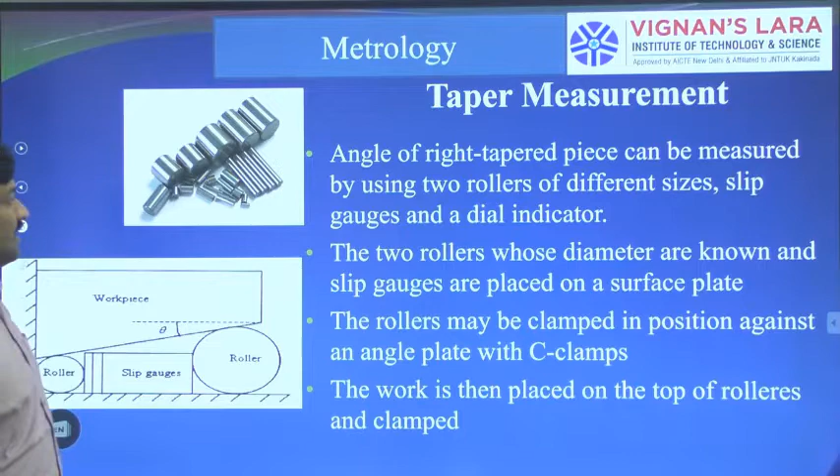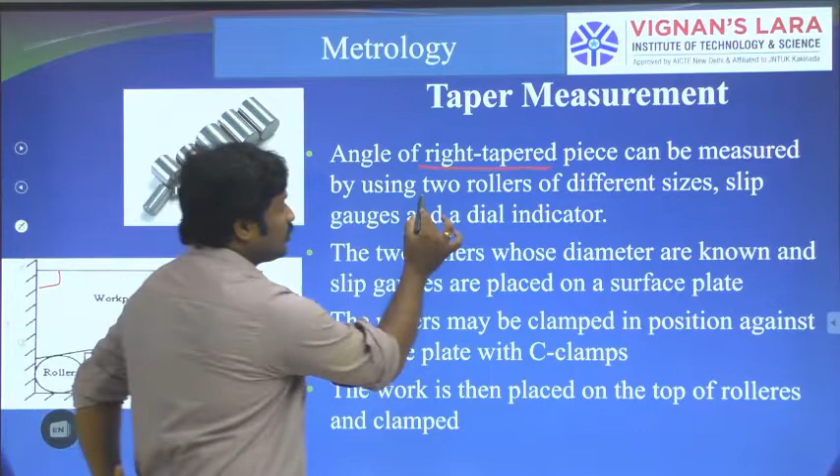Taper measurement: the angle of a right tapered piece. This is the component of a right tapered piece, where one of the angles is 90 degrees. If the component is right tapered, we need to know the procedure to measure the taper angle theta of this component. The angle of a right tapered piece can be measured using two rollers of different sizes. For this we require two rollers of different sizes, slip gauges, and a dial indicator.

If we observe here, two rollers are placed, and above the rollers the component is placed. We select two rollers of known diameter and a number of slip gauges. The rollers, whose diameters are known, along with the slip gauges, are placed on a surface plate.

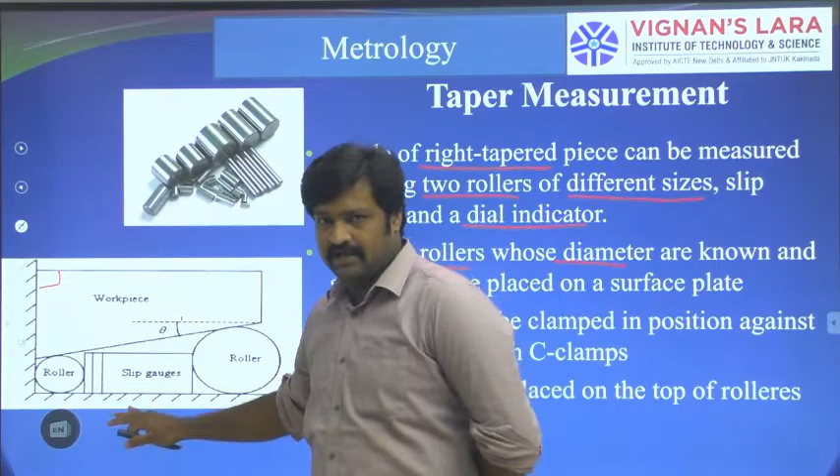First we need to take a surface plate. On top of the surface plate we place two rollers, whose diameters should be known. Only then can we use those rollers. On top of the rollers we place the component.

Next, the rollers may be clamped in position against an angle plate with C clamps. To maintain the rollers at a constant position, we use C clamps for arresting these rollers.

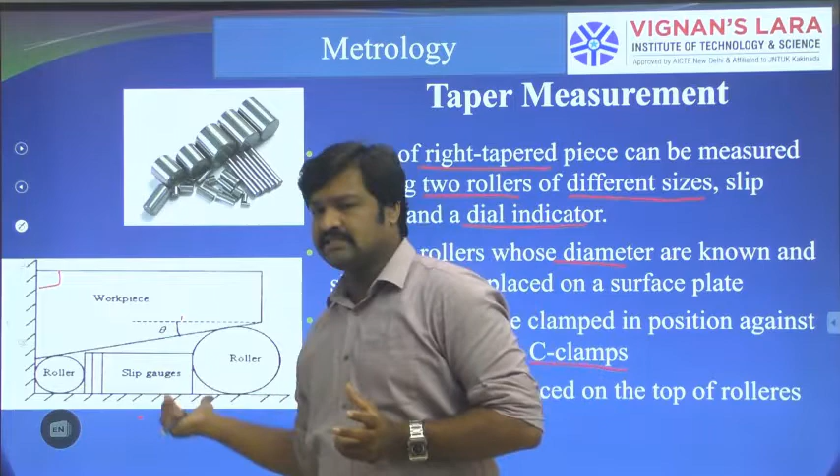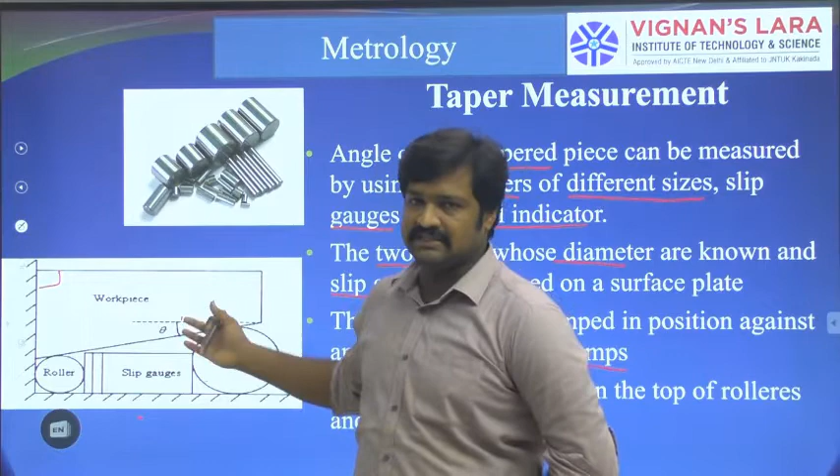The workpiece is then placed on top of the two rollers and clamped. If the angle of the piece is a right angle, the top edge will be parallel to the top of the surface plate.

The rollers can be adjusted such that the top surface of our workpiece is parallel to our surface plate. We need to adjust the rollers until the top surface is parallel to the surface plate.

To identify whether the surface is parallel or not, we use dial indicators. By moving the dial indicator along the top surface, it should show zero deflection throughout the length. If it shows zero deflection, then the upper surface of the component is parallel to our surface plate.

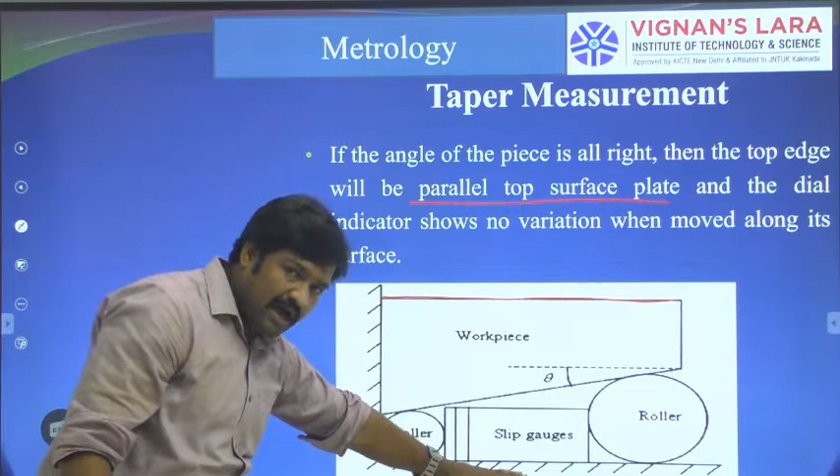The dial indicator shows no variation when moved along its surface. Until the dial indicator shows zero deflection, we need to adjust the rollers so that it shows zero.

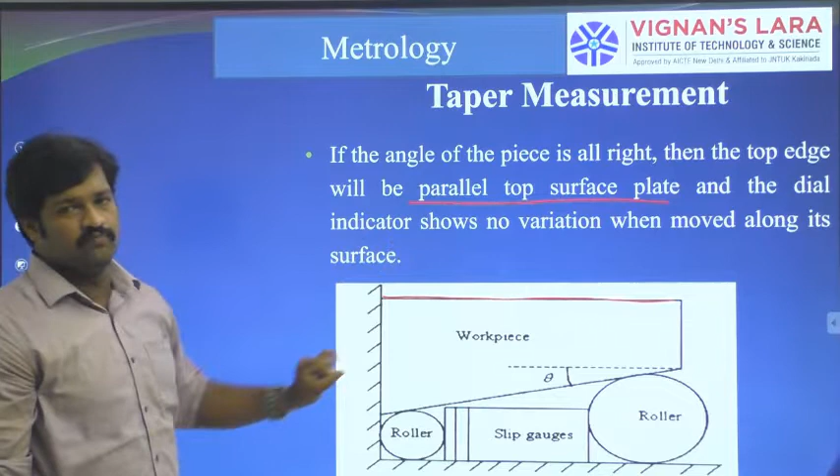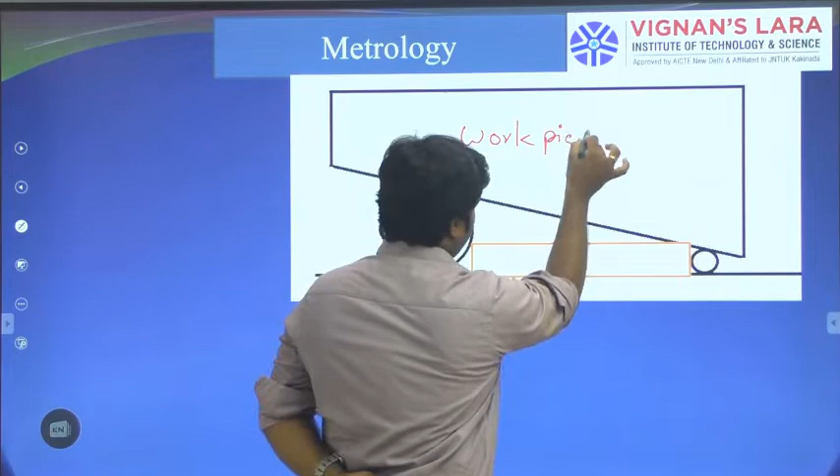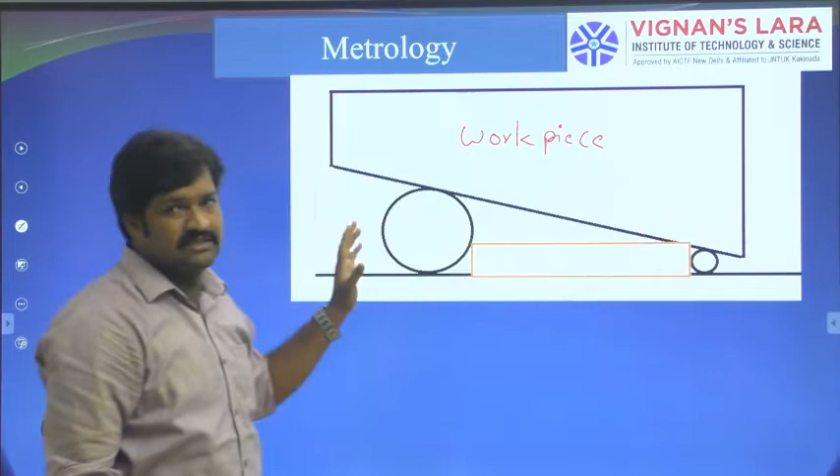This is the schematic: this is our workpiece, and on the bottom we use two rollers. In between these two rollers, some amount of slip gauges are placed. To identify the distance between the two rollers, we place slip gauges.

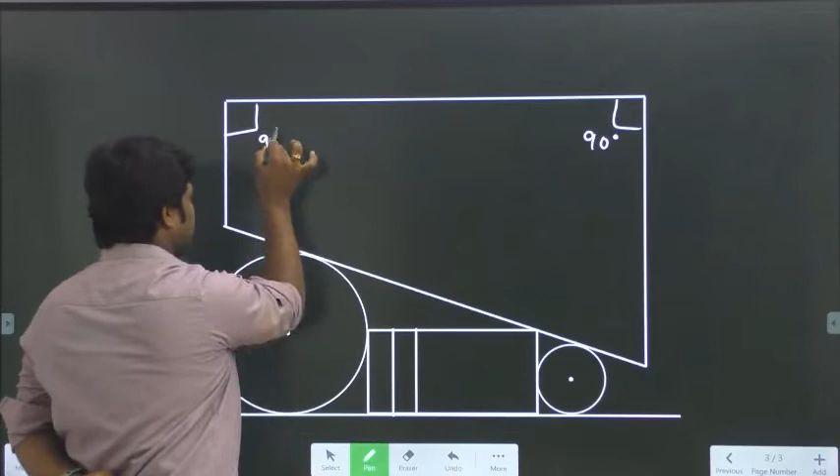The top one is the right angled workpiece. This is a right angle, and here also it's a right angle. The angle of this component is 90 degrees. Now we need to identify the taper angle, which is angle theta.

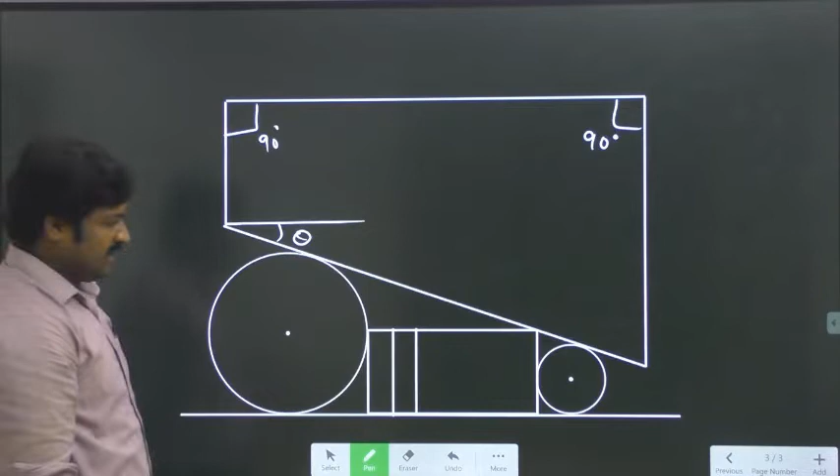For this purpose, we consider two rollers, roller 1 and roller 2, having known diameters. The smaller one has a diameter D1 and the bigger one has a diameter D2. So D1 equals the smaller diameter, whereas D2 is the bigger diameter.

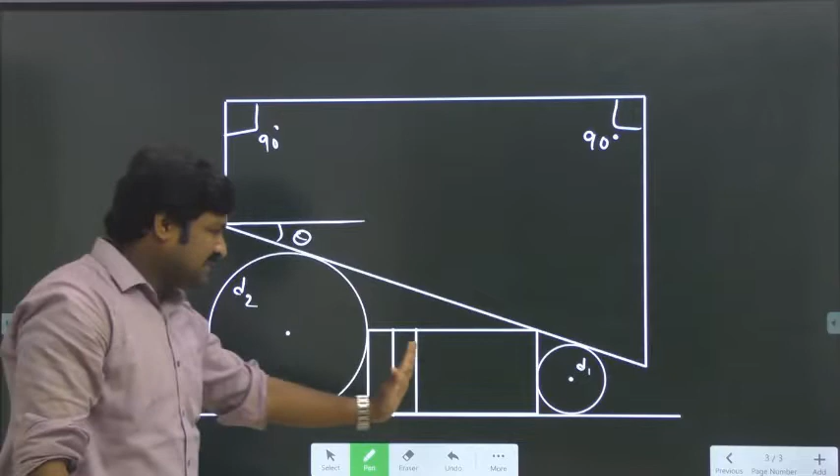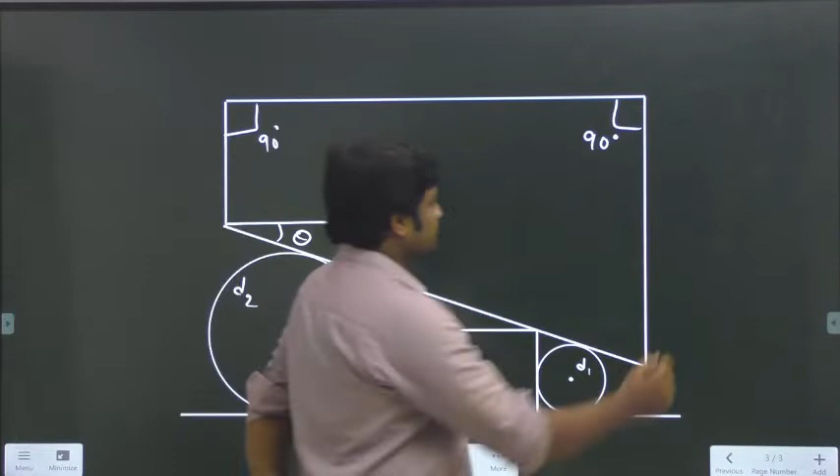Now in between these two rollers we place slip gauges. We know the length of the slip gauges, since each slip gauge has its thickness value marked on one of its faces. If we add up all the values, we get the length of the slip gauges, considered as L. So D1 equals roller 1 diameter, D2 equals roller 2 diameter, and L equals the length of the slip gauges.

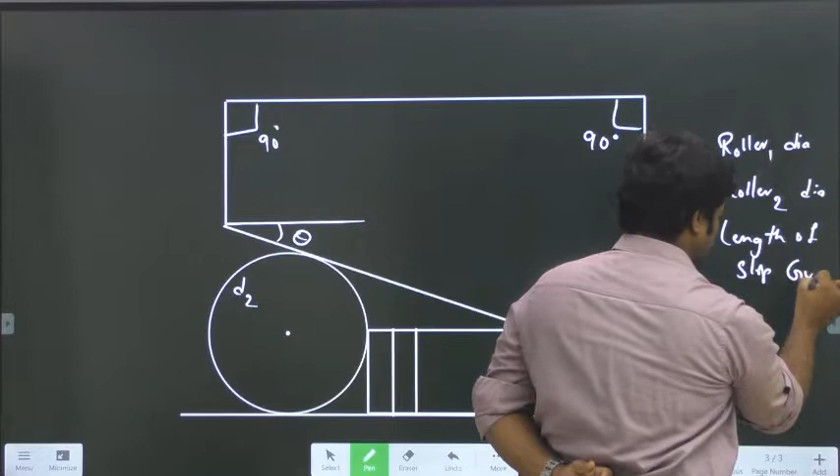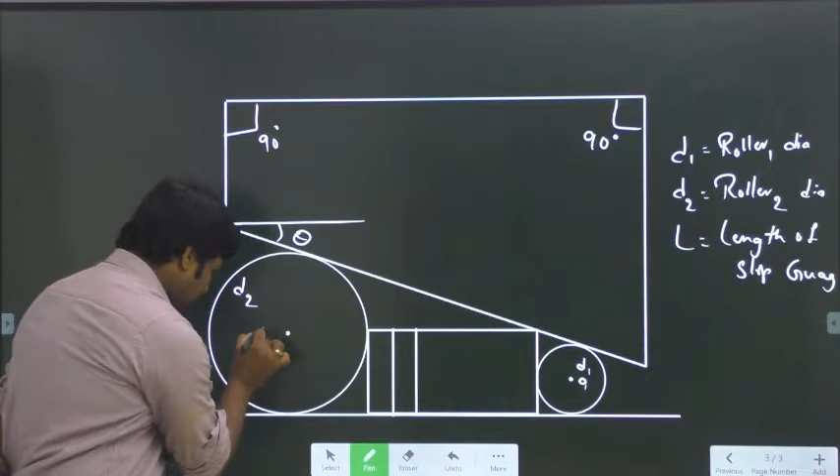So the center of D1 I am considering as O1, and the center of the second roller is O2.

So now I am drawing a line parallel to the surface. I am placing this line from the center of O1. Now it is parallel to our surface. Similarly, we are drawing one more line.

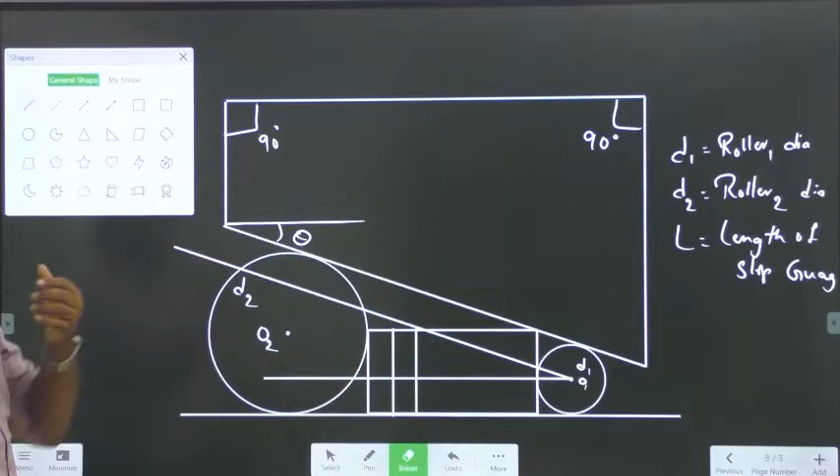Now this line is along the bottom surface of our component. Now we are placing this line. This is the line parallel to our slope, meaning our angle. Now one more line, parallel to this. So now this is the angle theta.

Now this is the angle theta. So theta is to be identified. We have drawn this, so now we are drawing one more line.

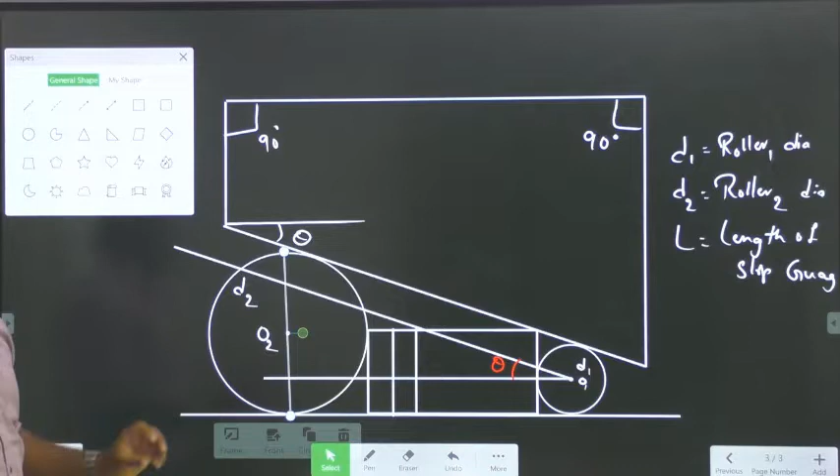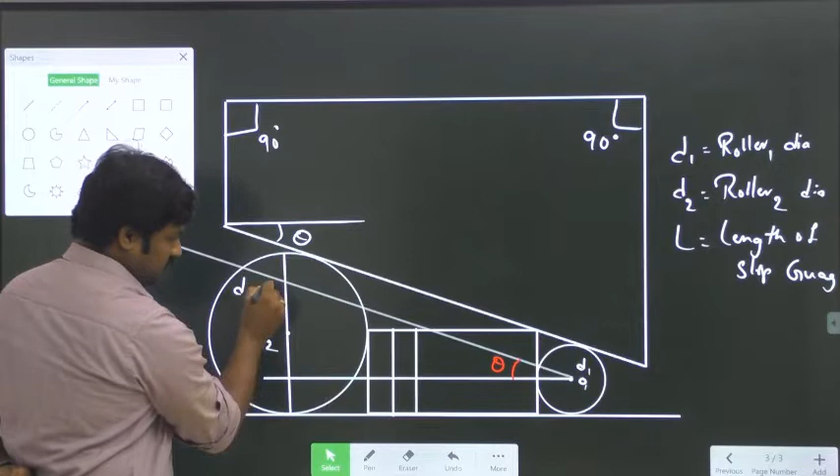Now the line is having a diameter of D2. So now we are marking this, labeling this as O1, O2. Now I am labeling this as A and this as B.

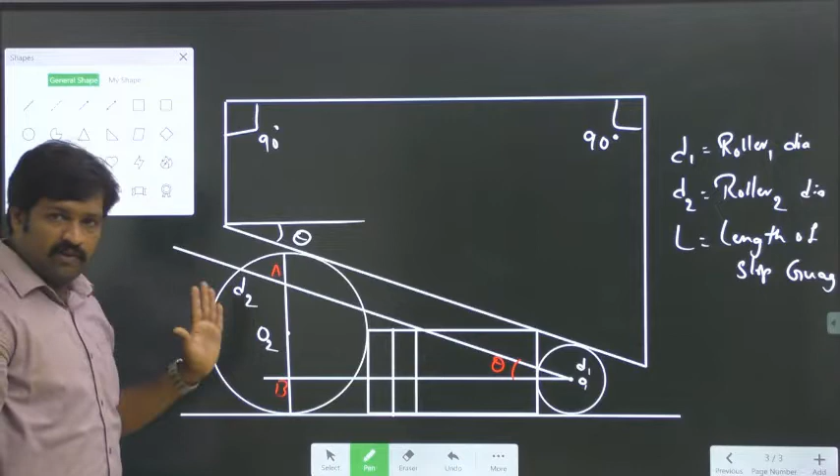So now I am drawing one more line that bisects the angle, from here to here. This line is bisecting our angle, therefore our angle is theta by 2. Now the angle is theta by 2. So here A, O to B.

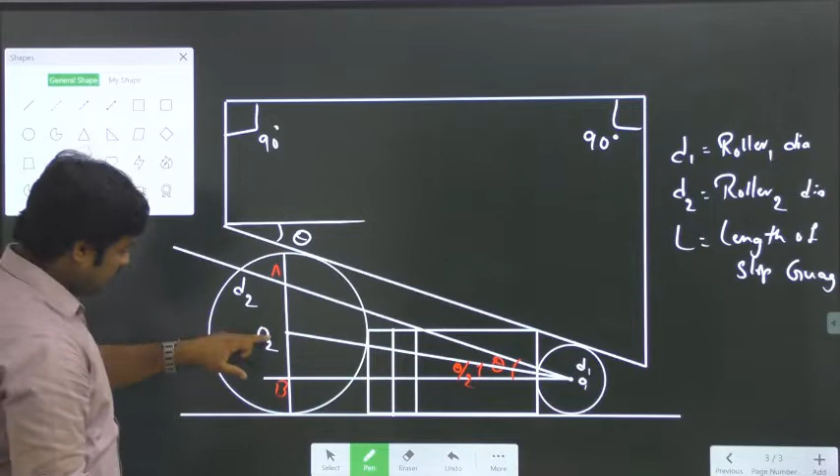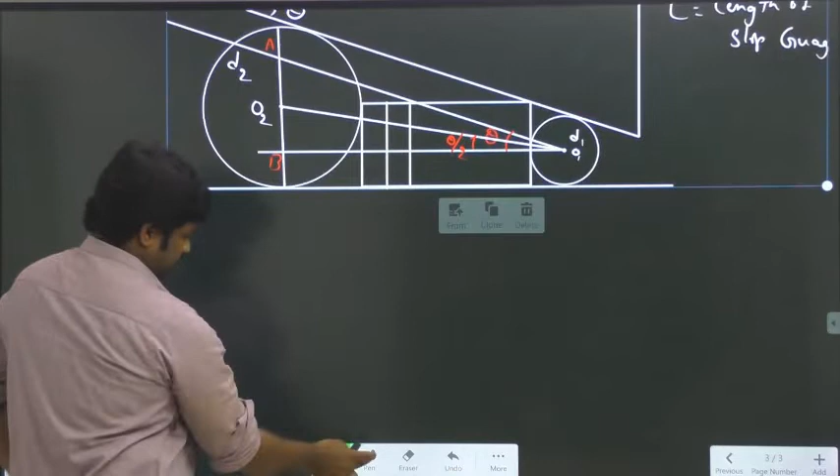So now we will take the triangle O1, O2 and B. From this triangle, tan theta by 2 equals the tan formula: tan theta equals opposite side by adjacent side. Opposite side equals O2 to B by O1 and O2.

Now we need to identify the lengths. From here to here, the length is D2. From here to here, the length is D1. From here to here, the length is L, that is the length of the slip gauges. Okay, these are the various lengths.

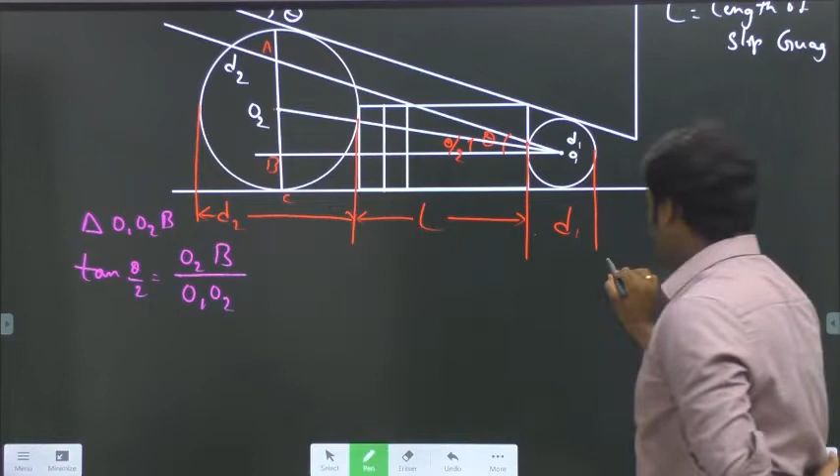So now we want O2 to B, the distance from here to here. For that purpose, I am taking the point as C. So I am writing here: O2 to B equals O2 to C minus BC.

So O2 to C, that is the radius of our bigger roller: D2 by 2, minus B to C. This is parallel to here, so we will mention here also E. This one is a small e.

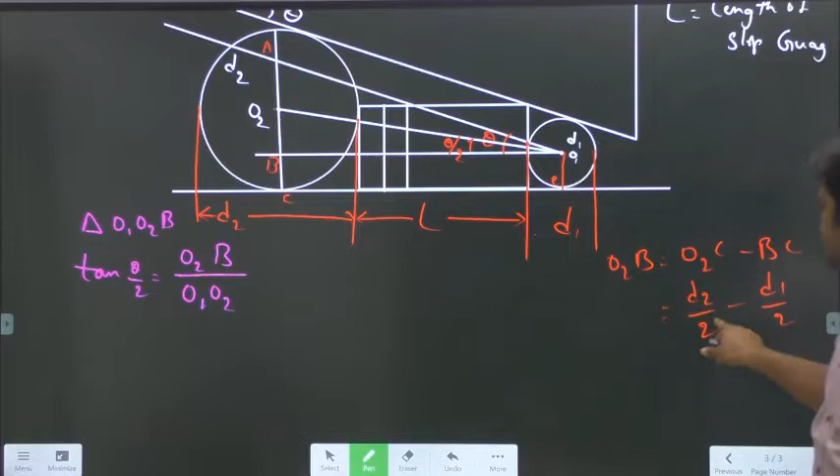So BC is equal to O1E. O1E is the radius of our small roller, that is D1 by 2. Therefore, O2 to B is equal to D2 by 2 minus D1 by 2.

Next, we want the length of O1 to O2. So here it is O1. Now we want the length from here to here, that is O1 to O2. From here to here it is D2.

Now we are taking only half of that. Therefore D2 by 2 plus the length of our slip gauges plus D1 by 2. This is our distance from O1 to O2. So now we are taking this as O2 to B.

O2 to B equals D2 by 2 minus D1 by 2, divided by D2 by 2 plus L plus D1 by 2. So that equals D2 minus D1 by D2 plus 2L plus D1.

So here denominator 2 and here denominator 2. After taking the LCM, we cancel both denominators. So therefore D2 minus D1 by D2 plus 2L plus D1. This is our formula. So finally, tan of theta by 2...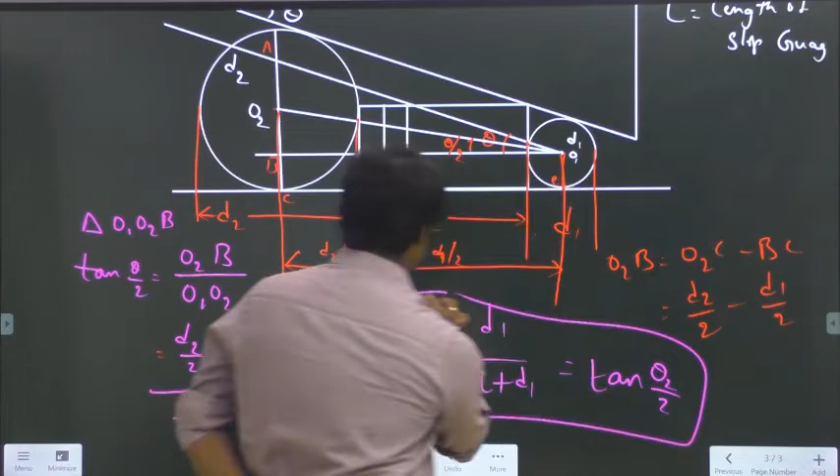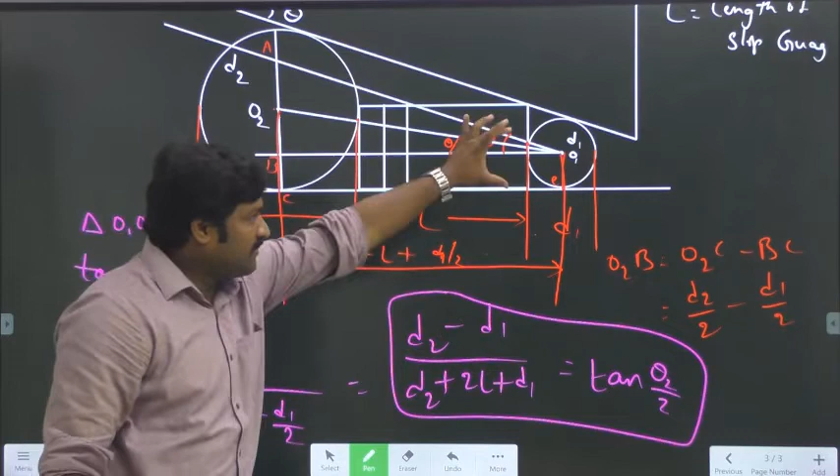Plus tan theta by 2, this is our formula. So tan of theta by 2 equals D2 minus D1 by D2 plus 2L plus D1. Here D2 is the diameter of the bigger roller, whereas D1 is the diameter of the small roller, and L is the length of the slip gauges. So this is the formula, by means of which we can identify the angle of the component.

So tan of theta by 2 equals this one. Theta by 2 equals tan inverse of this.

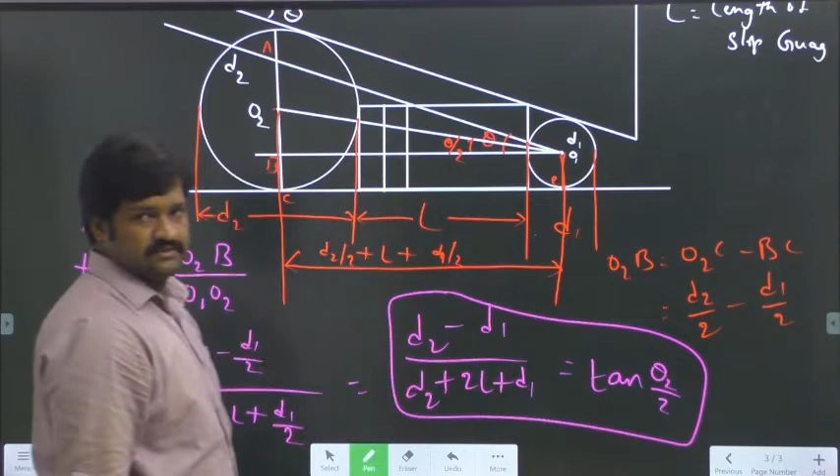So next, checking the angle using rollers, micrometers and slip gauges. So here, this is a taper plug. We need to identify the angle of this plug.

For identifying this, we are using slip gauges and micrometers also. By the taper plug, the taper is the distance between two rollers. Here we are using a single roller, in the sense, same diameter of two rollers. We are using two rollers having the same diameter, and we are using a certain length of slip gauges.

So first at one location, at one cross section, the diameter or the distance between two rollers is identified. For that purpose we are placing n number of slip gauges. To maintain a height we are using slip gauges, and the length of the slip gauges can be known. So after joining or bringing the slip gauges together, we can identify the length.

So at this first position, at a certain height, the distance between two rollers is identified as W1, and these rollers are shifted to one more position. So this is the first location. After that, the rollers can be placed here.

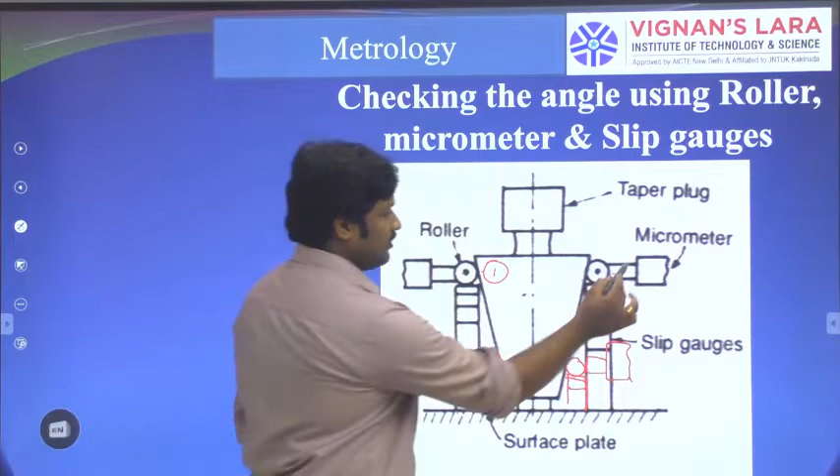Again, we need to identify the length by means of a micrometer. So this is the micrometer. By means of this micrometer, we are identifying the distance and we are considering that as W2.

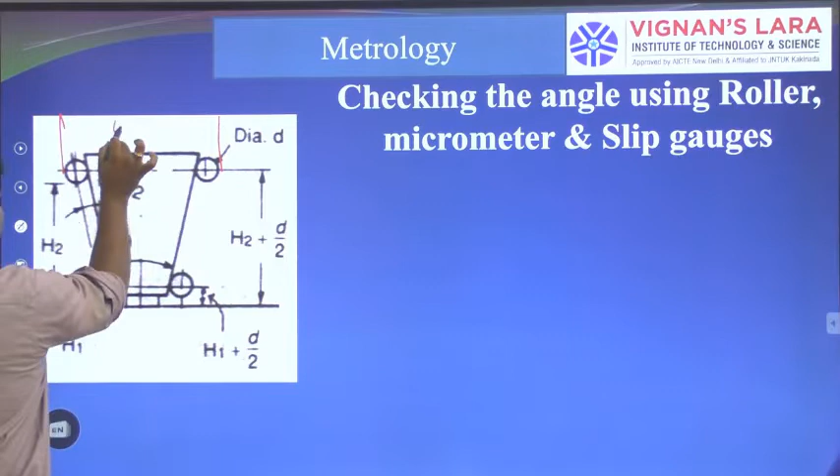So now the width from here to here, that is W1, and from here to here, that is W2. So first we have taken a value at a certain height H2.

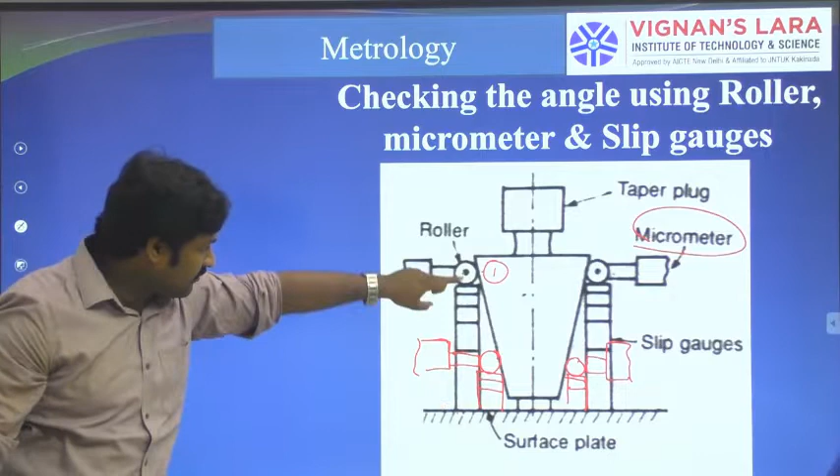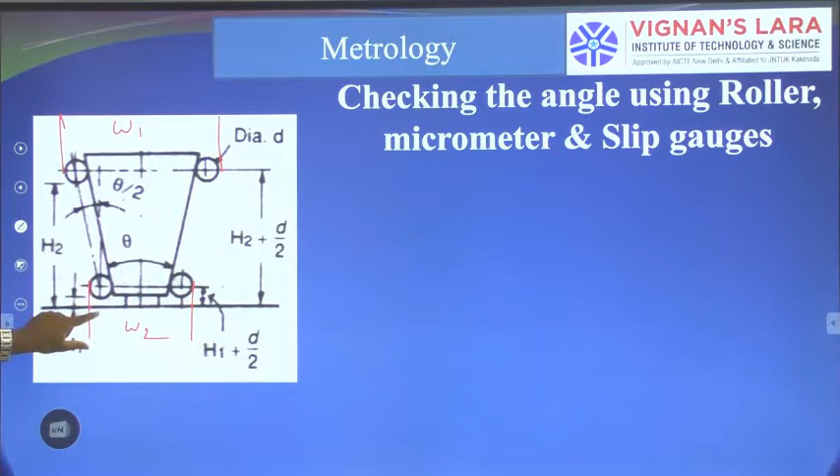So from here to here we placed some slip gauges. From here, up to the roller, we placed slip gauges and we calculated the width. So from here to here, that is height H2, and from here to here, the height is H1. Now we will see the measurement.

So this is the taper plug, our workpiece, and these are the various slip gauges. First the height of the slip gauges is H1. This one is also H1, and these are the various slip gauges with a height of H2, and this is a height of H2.

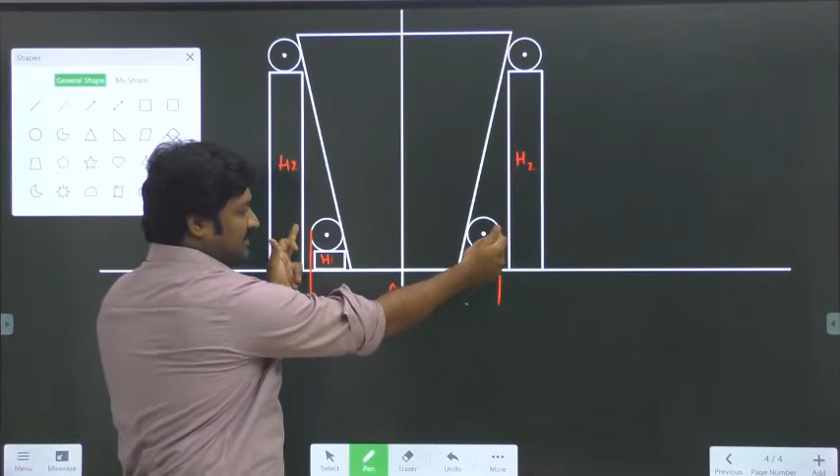So now, at one first location we identified the distance between these two, from here to here, that is measurement 1. By means of micrometer we measured the width, the measurement between these two rollers, that is now the diameter, M1. Similarly, at second location, the distance between these two rollers is M2.

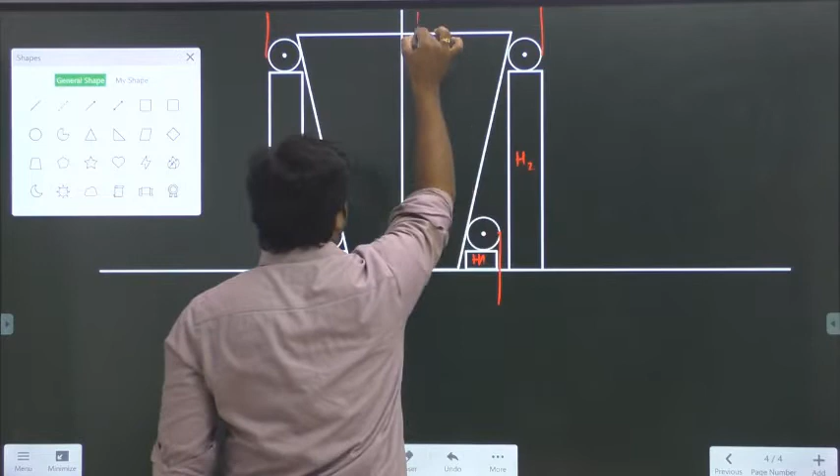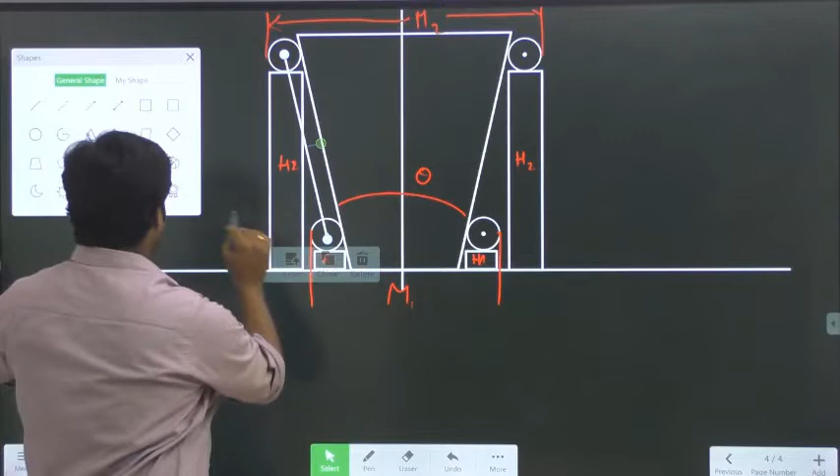Now we want to identify the angle from here to here, that is theta. So now what we are doing is, we are drawing a line from the center of this diameter to the center of this diameter. So next we are drawing a line parallel to our axis and from the center. So I am considering this center as O1 and the center as O2.

So now we are drawing one more line from here to here, and I am marking this as A. Now the angle from here to here, that angle is theta by 2.

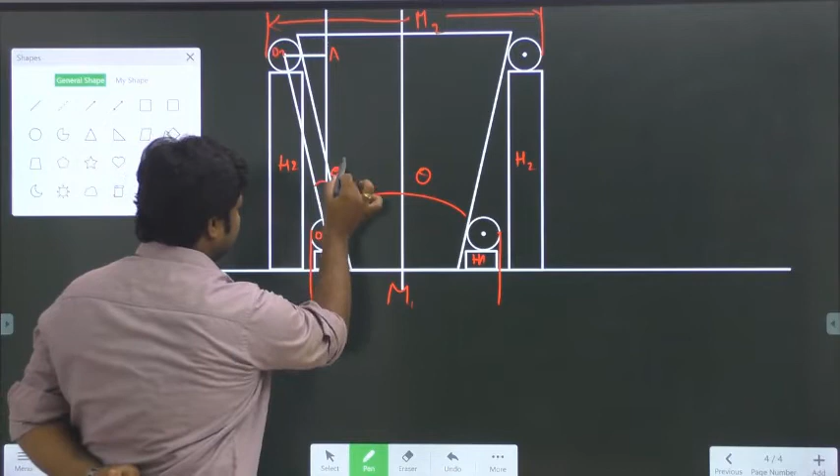So clearly see here, what we did is, we drew a line from O2 to O1 and we shifted the axis, and we drew a line parallel to our axis from O1, and a line parallel to our surface from O2. So now we formed a triangle O1, O2 and A, and the angle is theta by 2.

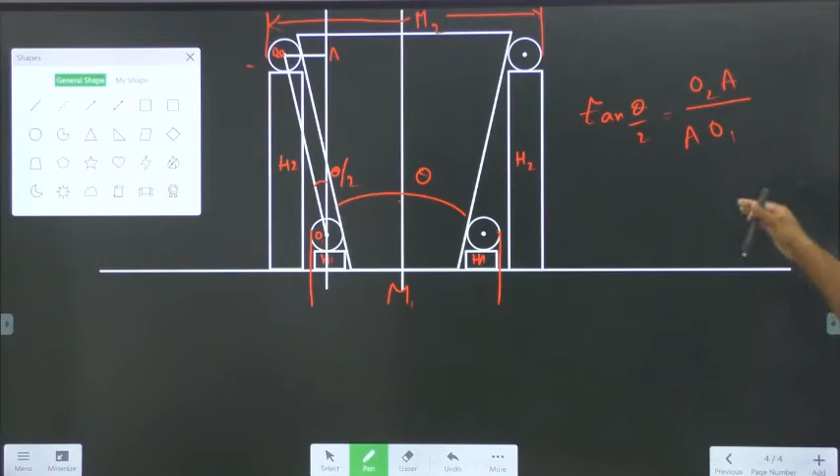Now, tan of theta by 2 equal to opposite side by adjacent side. So from here, tan of theta by 2 equal to opposite side, that is equal to O2 to A by A to O1. So the distance from A to O1 is our adjacent side and the opposite side is O2 to A. Now we need to identify the distance from O2 to A.

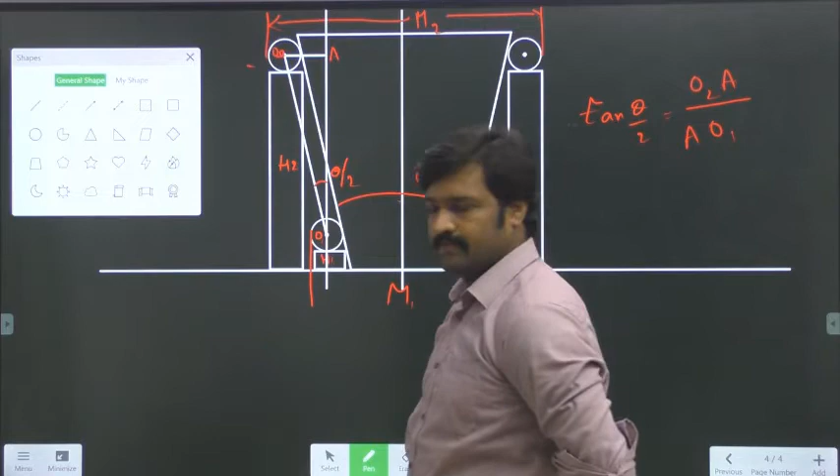As we know, the distance from here to here is M2, so from here to here it is M2 by 2. If we extend this line, marking this point as B and this one as C, the distance from C to B equals M2 by 2. Now, C to B equals M2 by 2. I want only the distance from here to there, so from here to here, having a diameter D, here it is only the radius, that is D by 2. So O2 to B is equal to M2 by 2 minus D by 2.

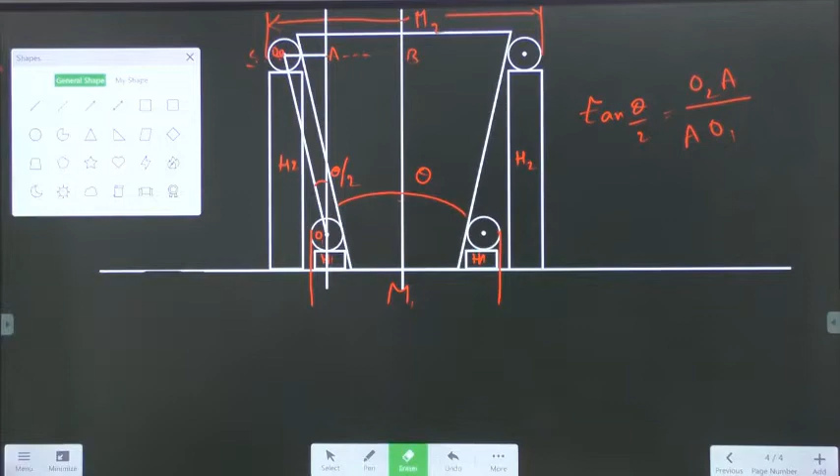Here we have the triangle of A, O1, O2. The distance from C to B equals M2 by 2. I want the distance only from O2 to B. So O2 to B equals CB minus CO2. From C to O2, that is the radius of our roller, that is D by 2. So that equals M2 by 2 minus D by 2. Now we have the distance O2 to B.

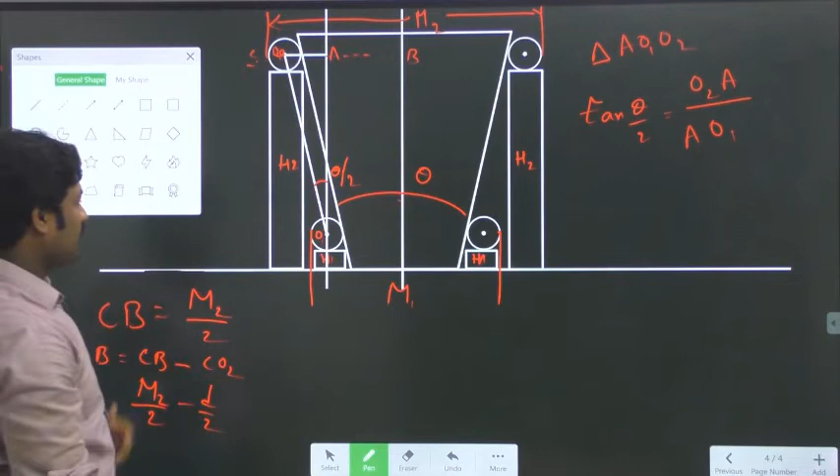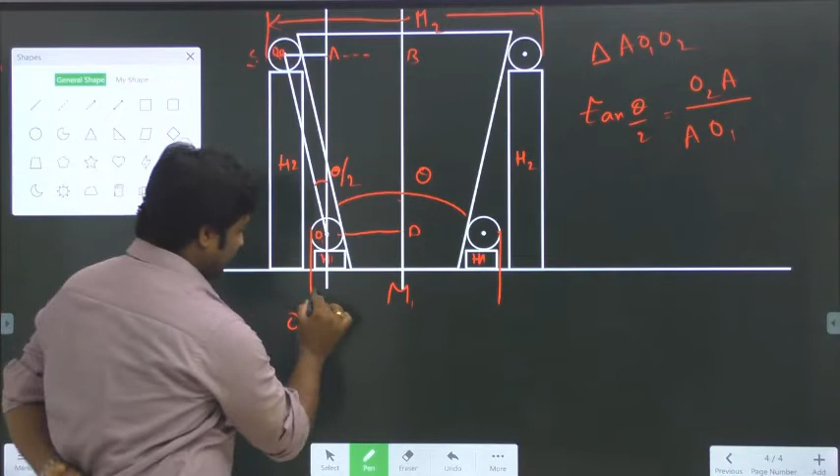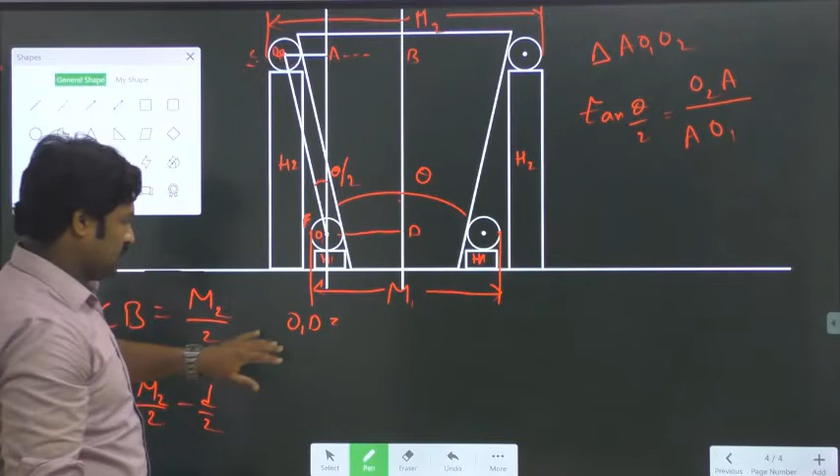I am drawing a line parallel to AB and marking this as D. Now I want the distance from O1 to D, but we have a length M1 from the outer surface of the roller to the outer surface of the other roller. I am considering this point as E. So E to D equals M1 by 2. I want the distance only from O1 to D. O1 to D equals E to D minus E to O1. So from here to here, E to D minus the radius of our small diameter, that equals M1 by 2 minus D by 2.

I want the distance from only O2 to A. So O2 to A can be written as B to O2 minus A to B, or otherwise as O2 to B minus AB. So O2 to B equals M2 by 2 minus D by 2, minus A to B, which is O1 to D. So A to B is equal to O1 to D, that equals M1 by 2 minus D by 2.

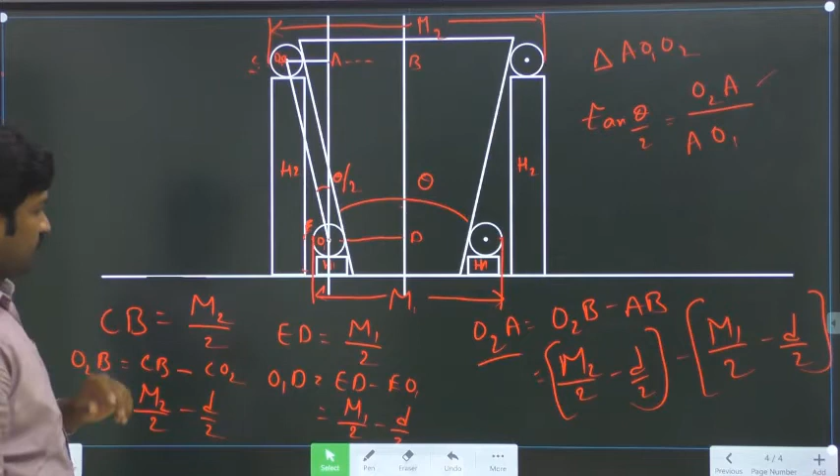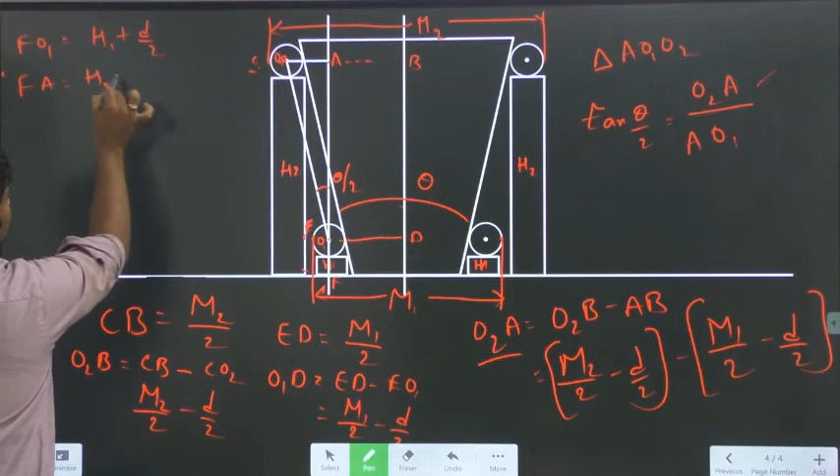Now we want to identify the distance from A to O1, knowing the heights H1 and H2. From here to O1, I am considering this as F. First, F to O1 equals H1 plus the radius of our roller, that is D by 2. Now again from here to A, I am considering this as F. So F to A equals H2 plus D by 2. Now I want the distance from A to O1. So A to O1 equals A to F minus O1 to F, that equals H2 plus D by 2 minus of H1 plus D by 2.

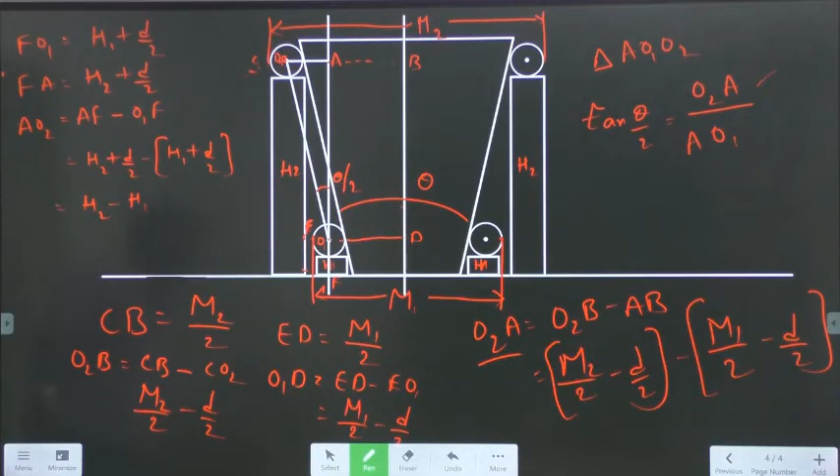Therefore, the D by 2 terms cancel, leaving H2 minus H1. So A to O1 is this. Now, from here, minus D by 2 plus D by 2 also cancel. So therefore, the result is M2 minus M1 by 2, by H2 minus H1.

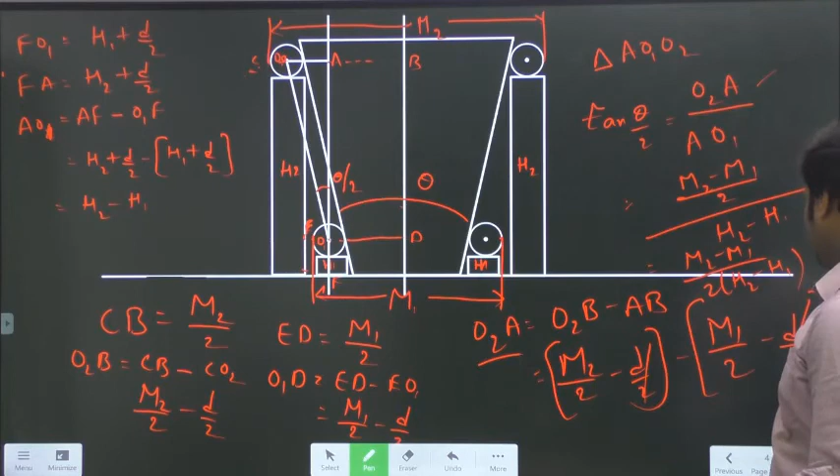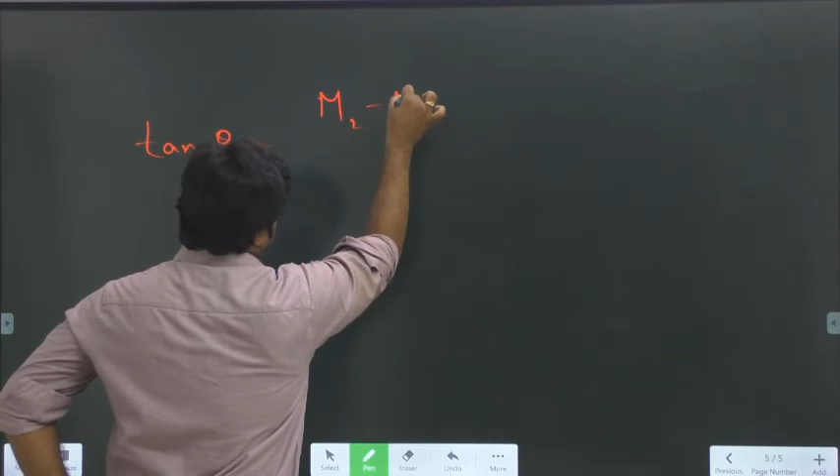Therefore, our answer is M2 minus M1 by 2 of H2 minus H1. Finally, tan of theta by 2 equals M2 minus M1 by 2 of H2 minus H1. So, M2 minus M1 by 2 of H2 minus H1. Therefore, this is our tan formula.